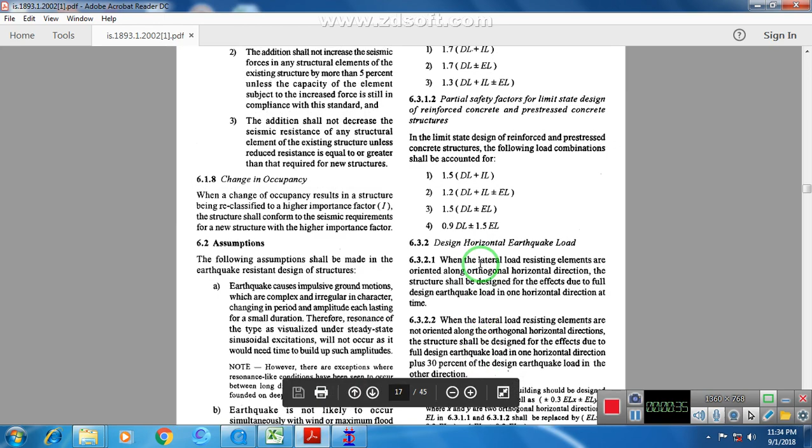Today I am making this video so that everyone can understand how to apply earthquake force in StaadPro. Before going into StaadPro, I will show you the codal provision, that is IS 1893 code, which is for earthquake forces. In this code there are certain definitions given which one should understand before applying earthquake forces in StaadPro. So guys, let's start.

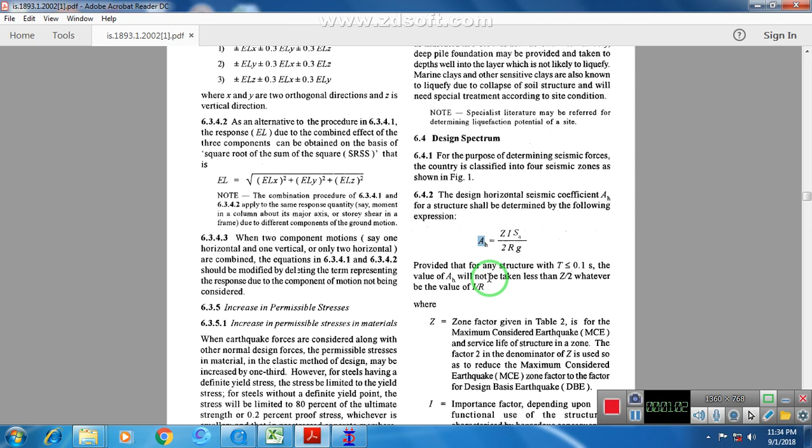This is a formula given in IS 1893. Ah is nothing but the horizontal acceleration which will hit a structure when an earthquake hits it. So ah is given as Z into I into Sa by g into 2R.

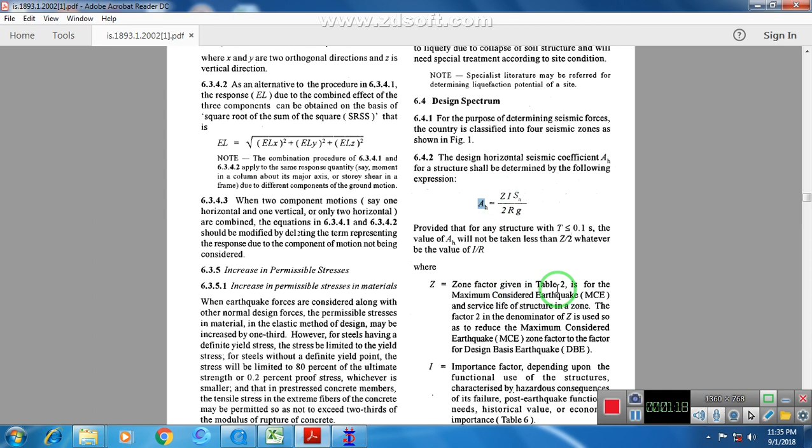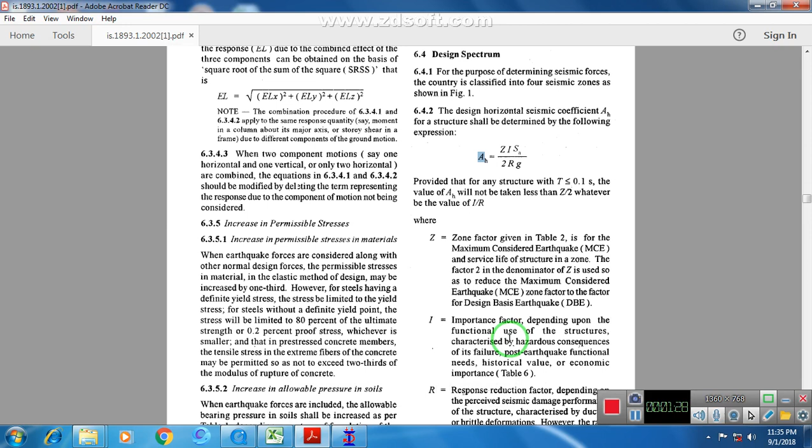Here Z is nothing but a zone factor which is given in table 2, and I is importance factor. Importance factor is nothing but how important a structure is, like whether it is a hospital, a residential building, or a firefighting building. On the basis of that, importance factors are given for different kinds of structures.

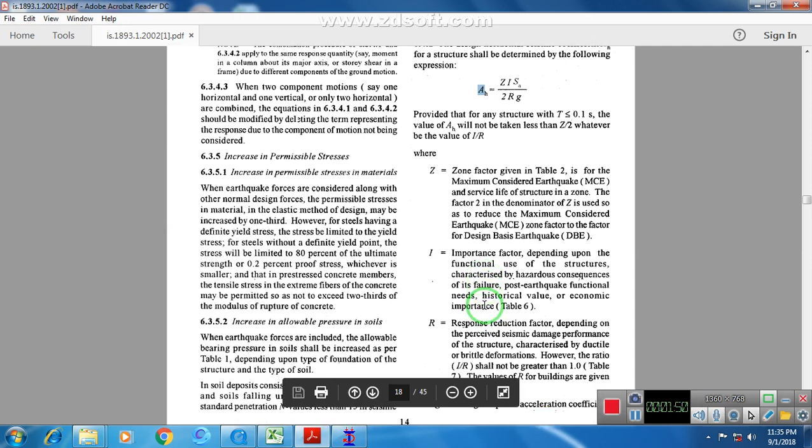And R is nothing but a response reduction factor, for which a table is given. This R value depends on which type of structure it is, like whether it is an ordinary moment resisting frame or a special moment resisting frame. On the basis of that, we have certain factors which we should consider.

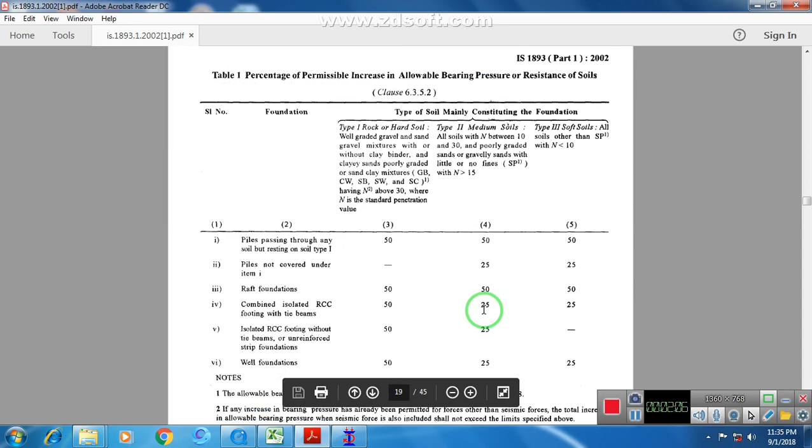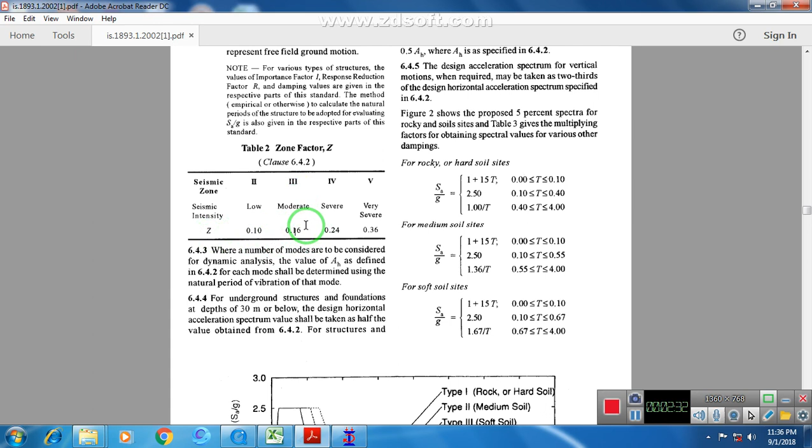I will show you the tables. This is the zone factor values. Here Z values are given for different seismic zone intensities, like we know that Mumbai falls under seismic zone 3. So for Mumbai, zone factor is 0.16. So this is about zone factor.

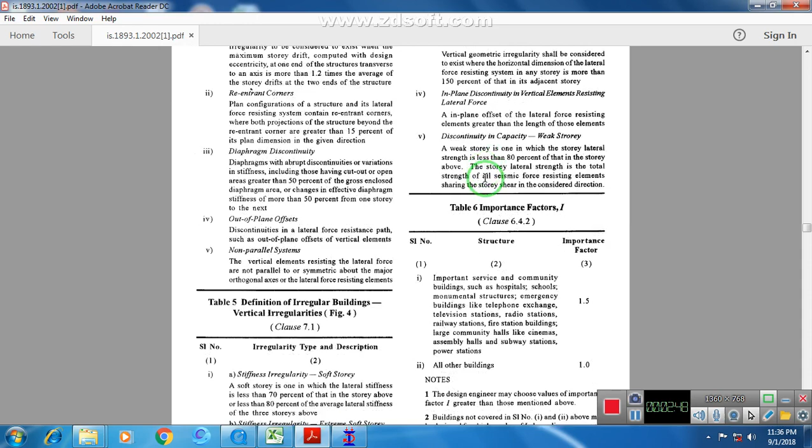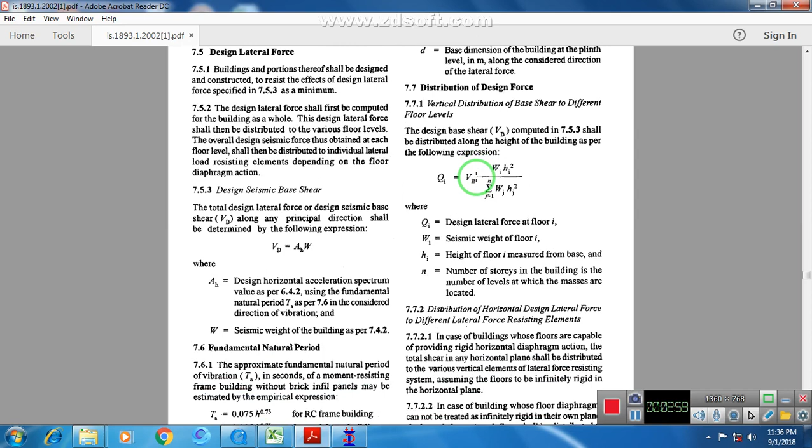And for Sa by g we have these values which depend on the time period. For this time period calculation, we have one formula given in this table only. That is T equals 0.09 H upon square root of D, where H is not printed in this PDF. So by this formula we can calculate the time period.

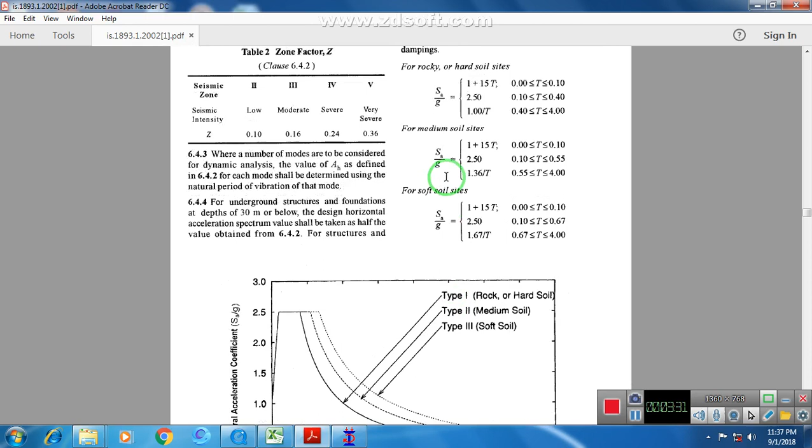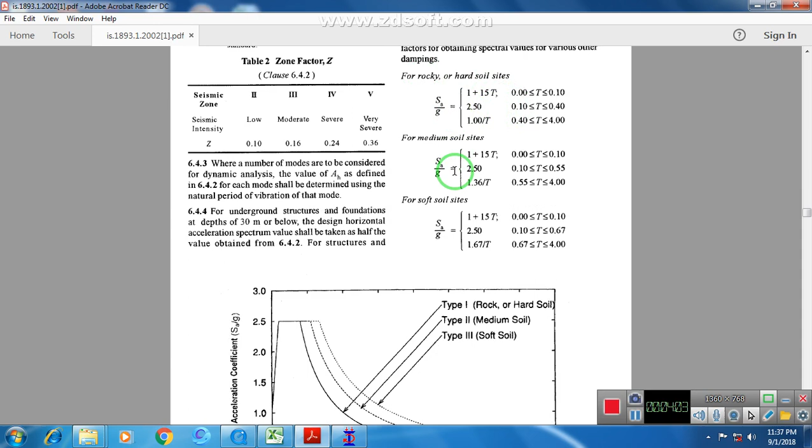Then by using this time period we can have a value of Sa by g. Here you can see we can put a value of T, and simply after that we can get a value of this Sa by g ratio. For that, one should know which type of soil strata is there, which can be identified by using a soil report. Since we don't have any soil report at the moment, I am considering it as rocky soil. So by using that we can calculate Sa by g.

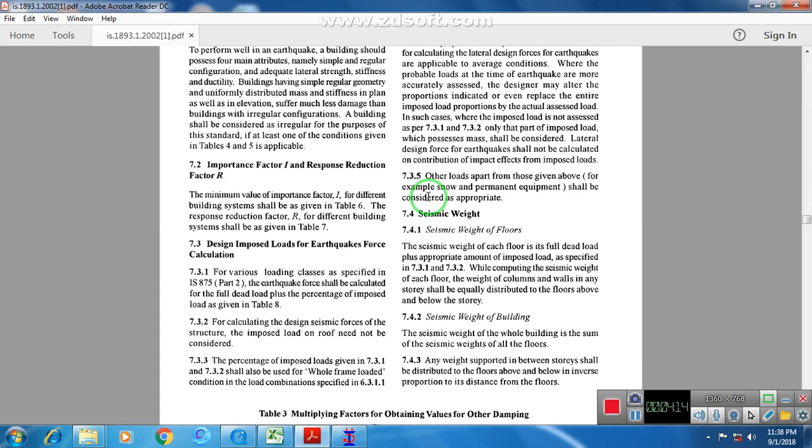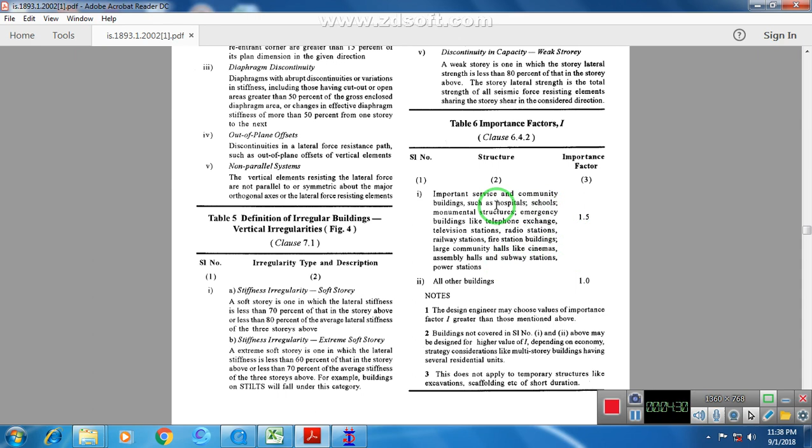So we have Z, Sa by g, and we have importance factor also. The only thing remaining is, as you can see, importance factor for important buildings like hospitals and schools is 1.5, and for all other buildings it is 1.

And the only thing remaining is our response reduction factor, which we should know. Here you can see table 7 which is given for response reduction factor R. Here different kinds of frames are there, and for those different kinds of frames we have different R values.

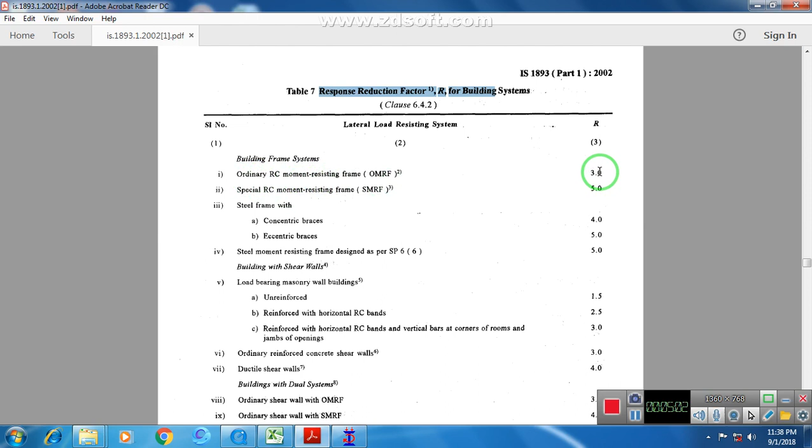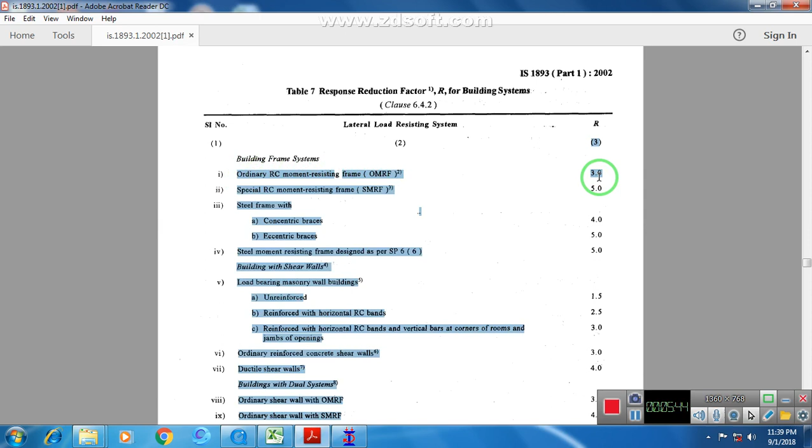For ordinary RCC moment resisting frame the value is 3, for special RC moment resisting frame the value is 5. Here ordinary RCC moment resisting frame means the columns and beams are not designed for ductile detailing, but in special RCC moment resisting frame we detail our columns and beams as ductile. Since our building is very small, we should not detail it with ductile detailing, as it will consume more reinforcement. So for such small buildings, ductile detailing is not required, so we will go with the ordinary RCC moment resisting frame, that is R equals 3.

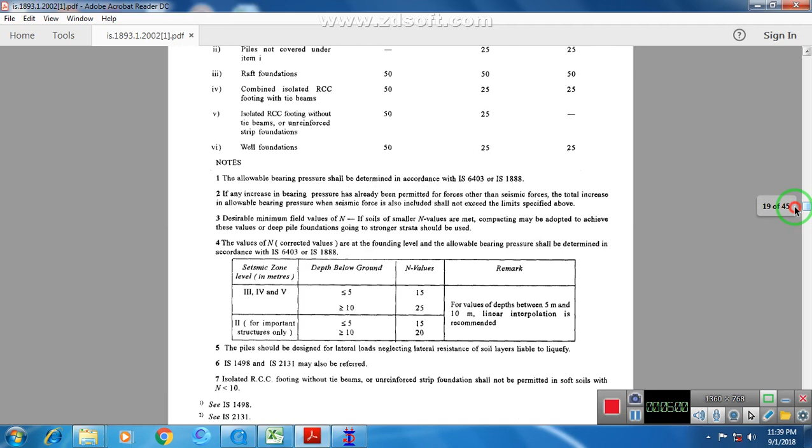So I have explained these terms so that you can understand what inputs are to be given in StaadPro. Now let's first go to the Staad model. I will use the same Staad model which I had used for wind load only, so that it will be easy for all of you to understand.

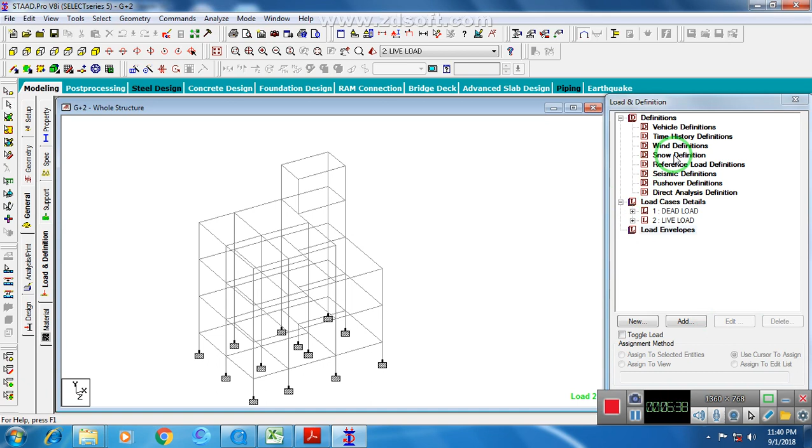Now since this video I am making for earthquake, I am going to delete this wind definition. Now I am going to delete this load case also related to wind. Now guys, let's first define a seismic definition.

So click here and click on add. Now select code. Our code is 1893, 2005... 2002. Okay, this is the code 1893:2002.

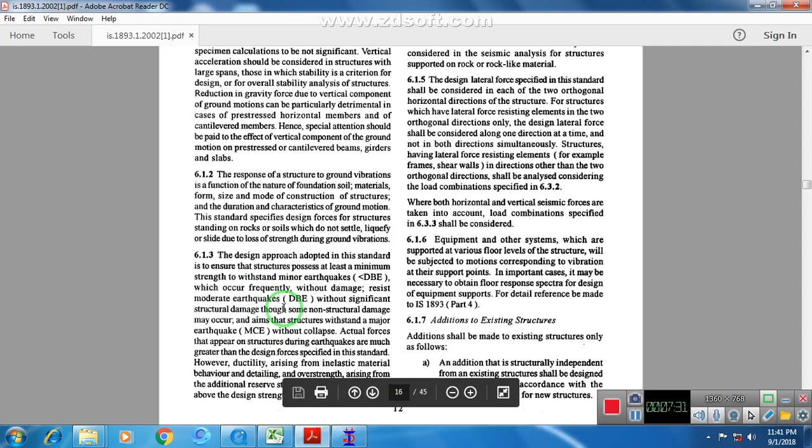So now either you can put values here, or you can simply click here on generate. Here you can put the Z value by selecting city or zone. If you select city, you have to select your city, or if you select zone, you will have 4 zone options, that is zone 2, zone 3, zone 4 and zone 5. These zones are mentioned in the IS code which I had shown you before.

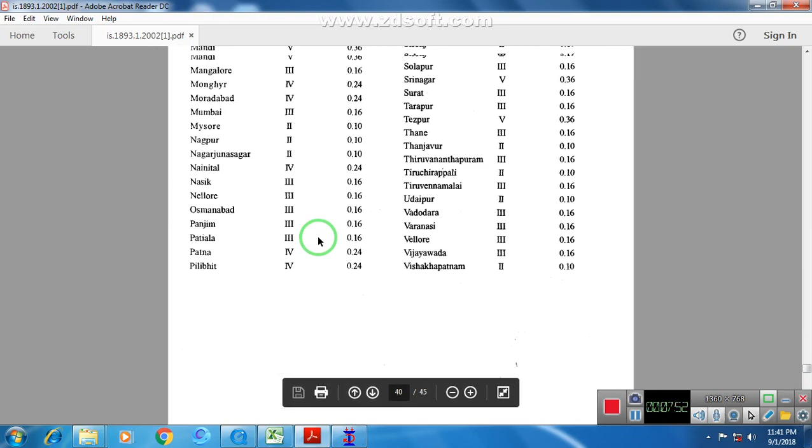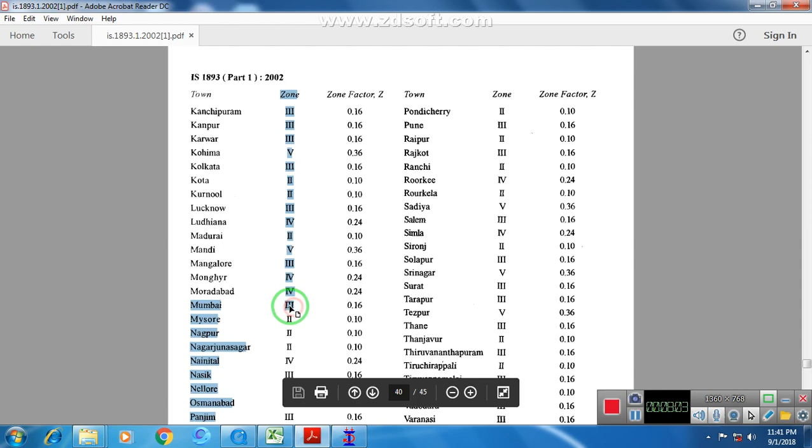Let me show you this one more time, like this: zone 2, zone 3, zone 4, zone 5. And we have a table also which shows different zone factor values for different cities. Like for Mumbai, we can see that Mumbai falls under zone 3, and for zone 3 we have zone factor as 0.16. So here you can simply select either zone or city, whatever you want. I am going with city, so this is Mumbai. For that, it is automatically taking 0.16.

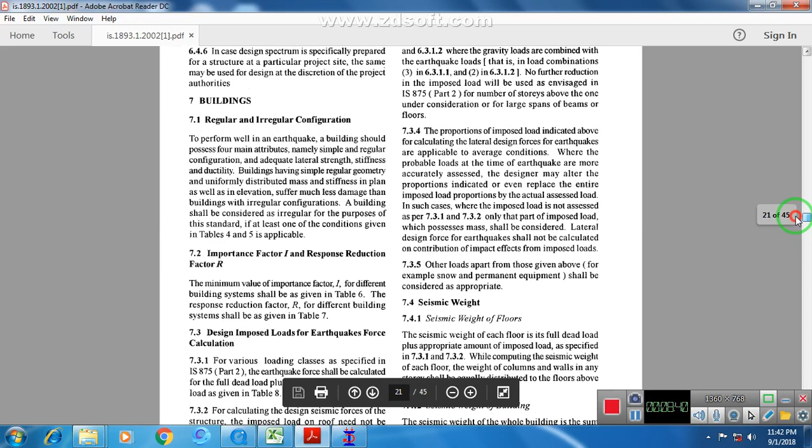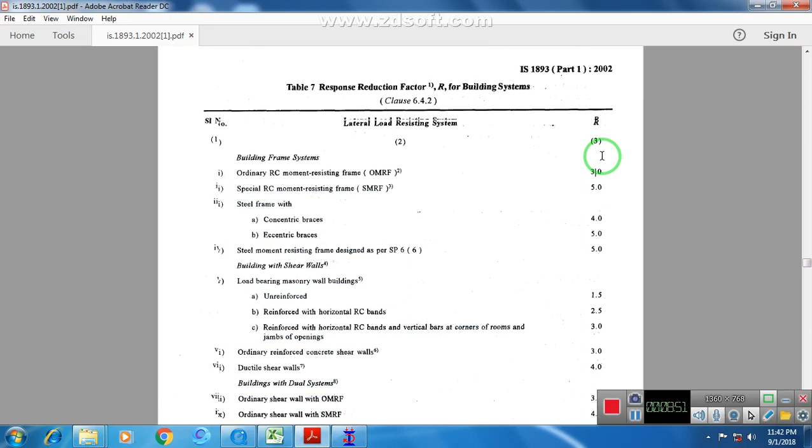Now as I told you, our structure will be an ordinary moment resisting frame, so I am selecting this, and for that the value is 3, as given in the IS code also. Here you can see for ordinary RC moment resisting frame, R is equal to 3. Okay, so now we have put this value.

Now importance factor: I'm considering it as a general building, so importance factor will be 1. And as I told you, I will consider a hard soil, so I am selecting hard soil. Then structural type, obviously our structure will be an RCC frame building, so I am selecting that. Damping ratio is different for RCC and steel structures. For steel structure this value is 2%, and for RCC structure it is 5%. This value is also mentioned in this IS code.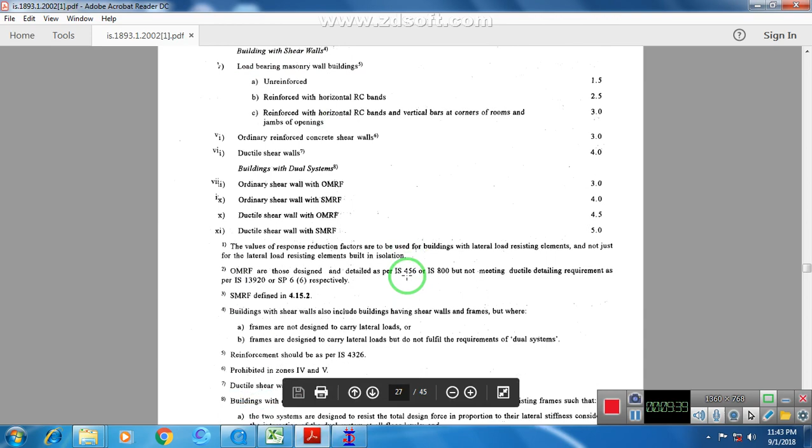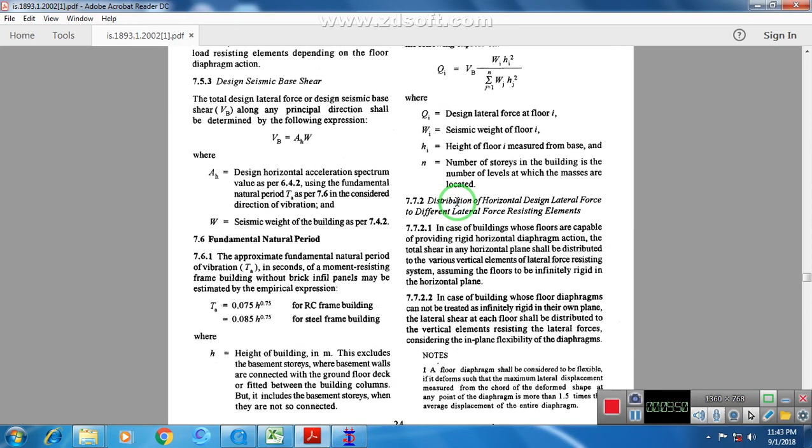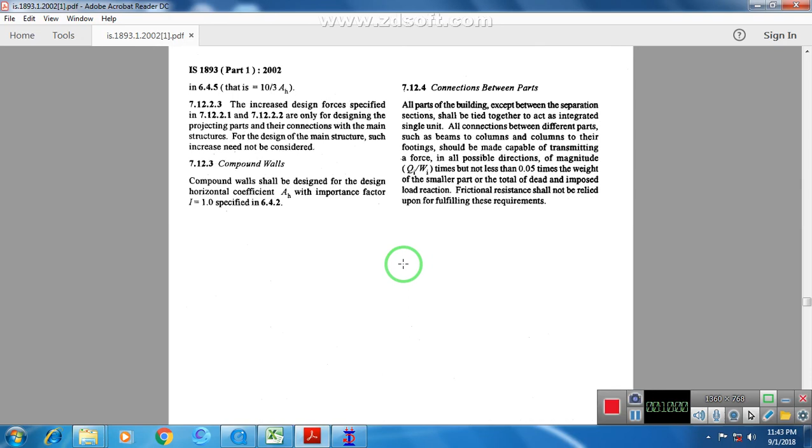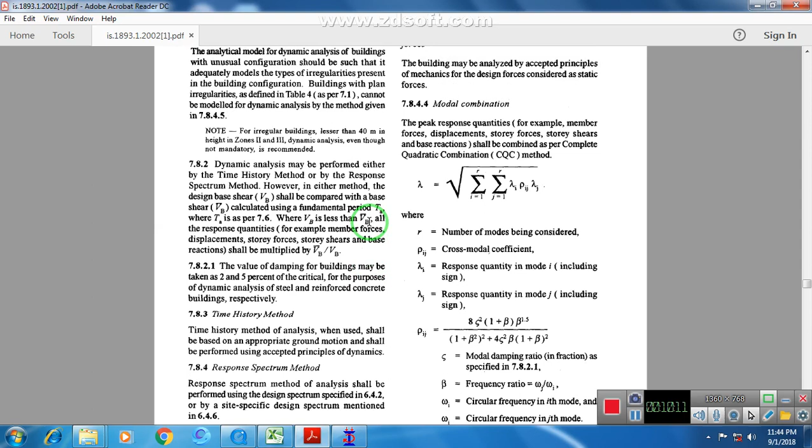So let's check where it is given. This value can be seen on page number 39. Here, the value of damping for buildings may be taken as 2% and 5% of the critical for the purposes of dynamic analysis of steel and reinforced concrete buildings. So 2 is for steel and 5 is for RCC concrete structures. Since our building is RCC, I am taking it as 5%.

Now, either you can put a time period yourself or let STAAD calculate it, but I will put this time period by my own calculation. For that I have made one Excel sheet. Don't worry guys, I will share this Excel sheet with you. Using this Excel sheet I will first calculate the time period which I have to put here. Then I will calculate Ah, and then the base shear, which we are going to cross check with STAAD Pro values. By doing this we can cross verify that STAAD Pro is giving correct values.

So let's proceed to calculate the time period. Here I have put the length, width and height of our building. Length of our building is 11 meter, width is 8 meter, and height is 14.1 meter. As I showed you, Z is the zone factor value; for Mumbai it is 0.16, and importance factor I am considering as 1. Response reduction factor I am taking as 3, and Sa/g value will be 2.5. This we will see after the time period calculation.

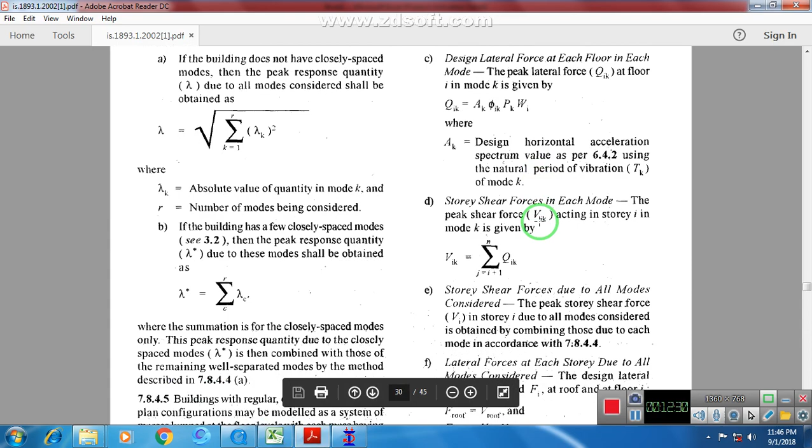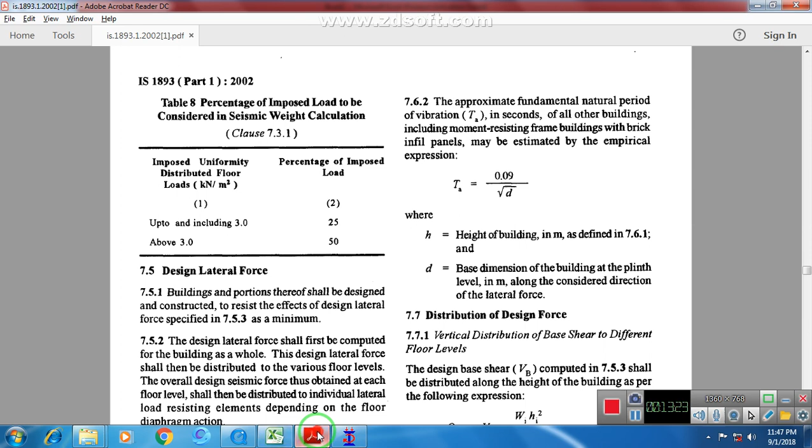For time period I had shown you one formula, T equals 0.09 H upon square root of D. Here is that formula. Using this formula I calculated the time periods for x direction and z direction. For x direction I have taken L, the length of the building, which is in x direction. Similarly I have calculated the time for z direction: T equals 0.09 h, height of the building, upon square root of base dimension. After calculating this time period we will calculate the Sa/g value from the code.

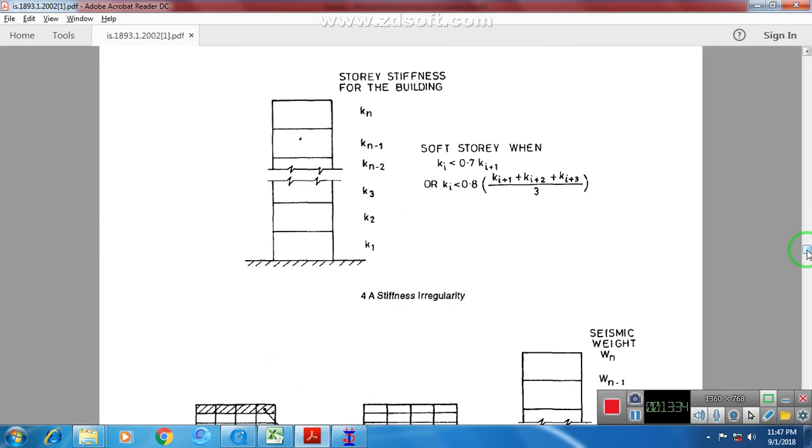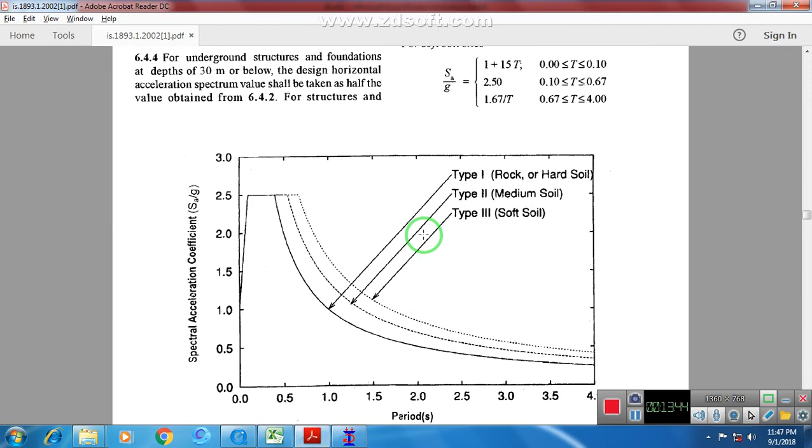So in the code we will see what value is to be considered for Sa/g. Since we have considered rock or hard soil, we will see these values only. Our time periods are 0.38 and 0.44. Our time period is not less than 0.1; it is greater than 0.1 and less than 0.4 for Tx. So for Tx we will take Sa/g as 2.5.

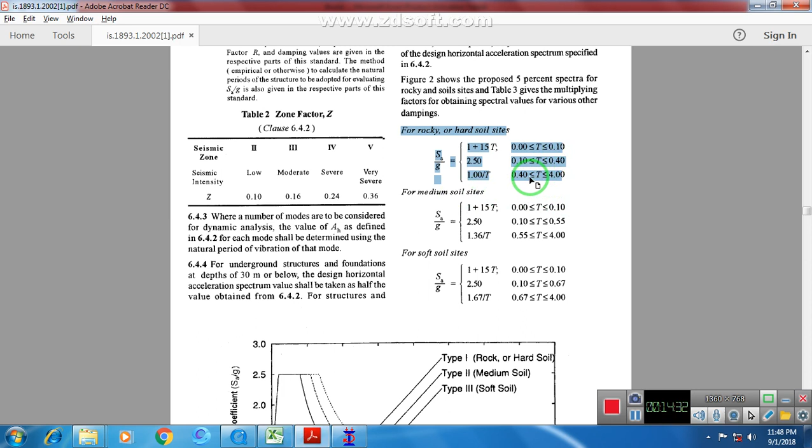Since our time period value is 0.44, which is greater than 0.4, for that we will take Sa/g as 1/T. So here I have taken Sa/g as 1/T for z direction since our Tz was greater than 0.4. Okay, so I have taken this condition for z direction, and for x direction I have considered this condition.

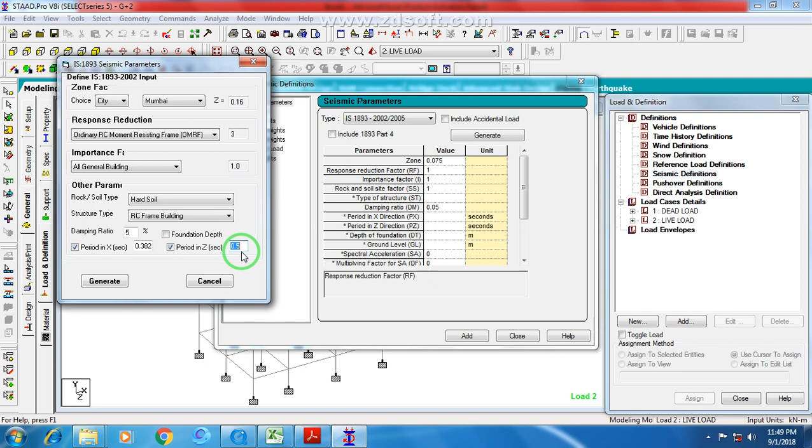So now we have time period. Let's put this time period value in STAAD Pro: 0.382 for X direction and 0.448 for Z direction. Okay guys, so now just click on generate. It will generate values here.

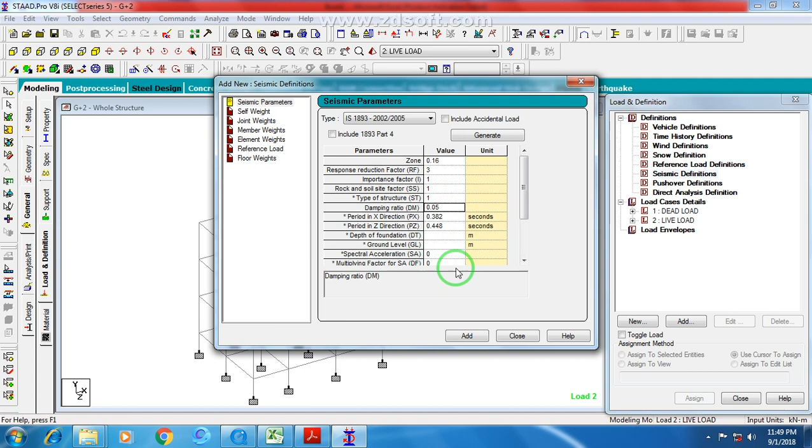Now there is one small problem with this: since this value is a percentage, it should be 0.05. Okay, now click on add. This self-weight factor should be 1, or you can just close it, it will consider it automatically. Now we have defined the seismic definition. Now let's hide it.

Now we will move to load case details. In load case details we already have dead and live, which is very important, because only from these loads will we get the seismic weight of the building, which will be used for seismic weight calculation. So let's add one seismic load case. Click add, select load type seismic,

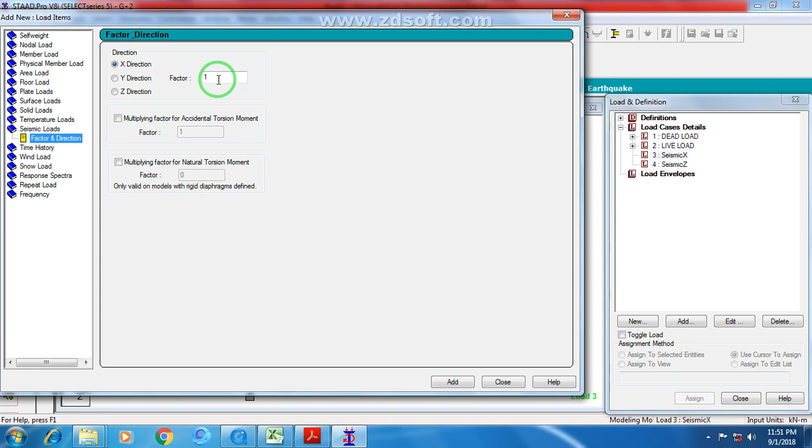seismic X. Okay, now click add. Now I will add one more, seismic Z. Click add. Now in seismic X, let's add a seismic load. Here you can see seismic load factor and direction. Since this is our seismic X, I will select X direction and factor will be 1.

So click 1, close. Then we will move to seismic Z, and here also I am going to add a seismic load. In this case I will consider Z direction and keep the factor as 1, just simply add 1.

Now guys, in STAAD Pro, to apply a static earthquake force definition, the earthquake load case must be the first load case. After the earthquake load case, we should define dead and live load cases, otherwise it will show an error. So your first load case must be the earthquake load case. After that you can define other load cases.

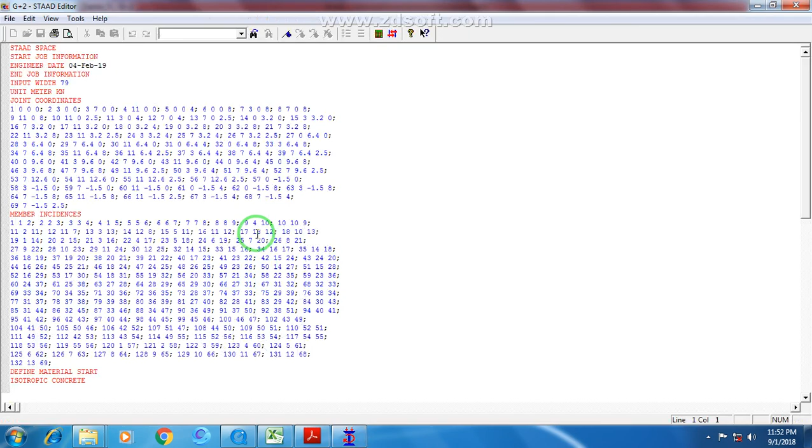Since I had defined these load cases earlier, I am defining earthquake after them, but I will correct it by going into the STAAD editor. Save. I will just cut and paste my earthquake load case before the dead and live load cases. From here onward I have the loading part, not load cases. So till here.

Now as you can see, this is my load definition for seismic forces, and from here onward I have the dead load type. This is the first load case, this is the second load case, live load, and this is my third and fourth load case, the earthquake load cases, which I must define before any other load cases. So I am pasting here and renumbering from 1, then this is 2. After that the other load cases will be 3 and 4.

Okay, so this is the sequence for defining earthquake force in STAAD Pro. First should be earthquake, then other load cases. Okay, now we have defined load cases. Now let's close it. Let's see. Yes, now it is correct. Seismic X, seismic Z, then after that dead and live.

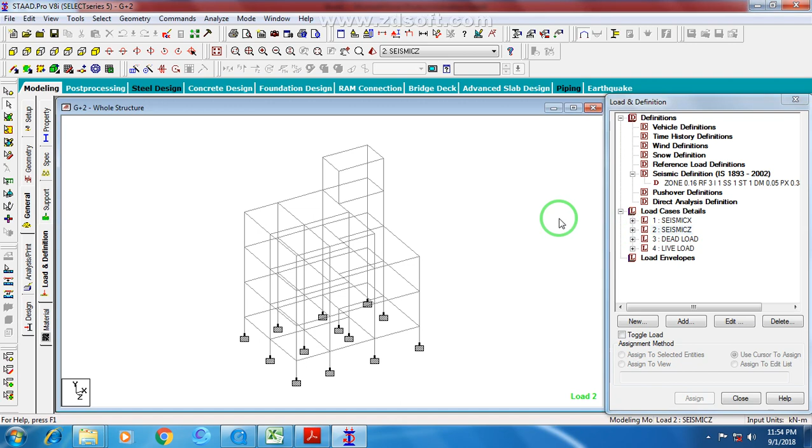Now we have defined a seismic definition, and we have also created load cases for seismic forces. Now the only thing remaining is calculation of seismic weight. For that we should tell STAAD Pro which loads to consider for the seismic weight of the building. Seismic weight is nothing but the dead weight of the building plus 25% or 50% of the live load.

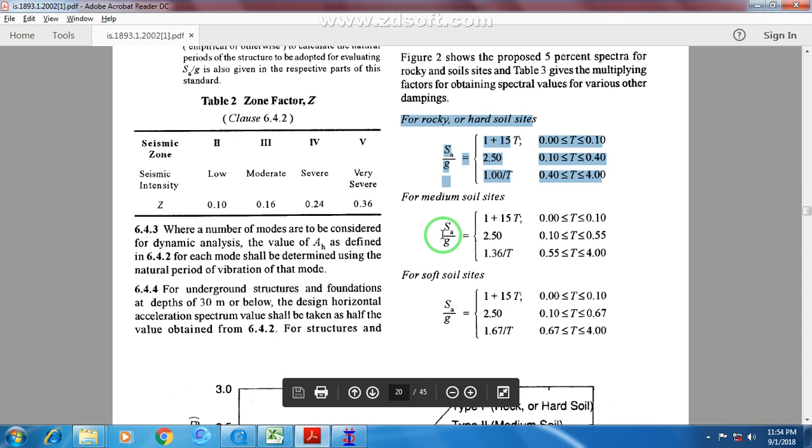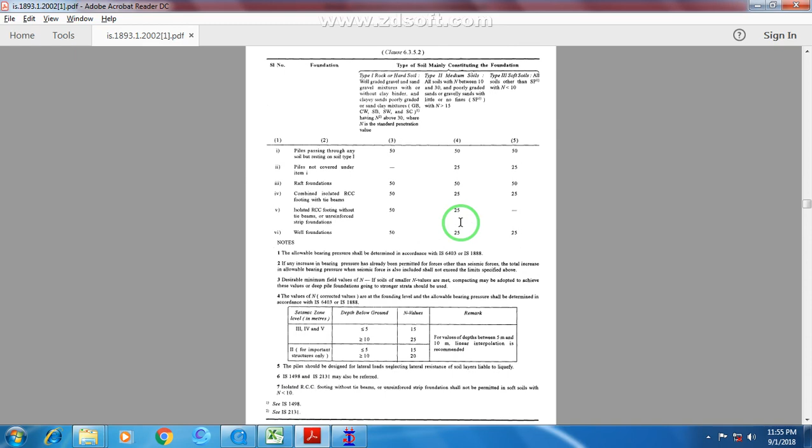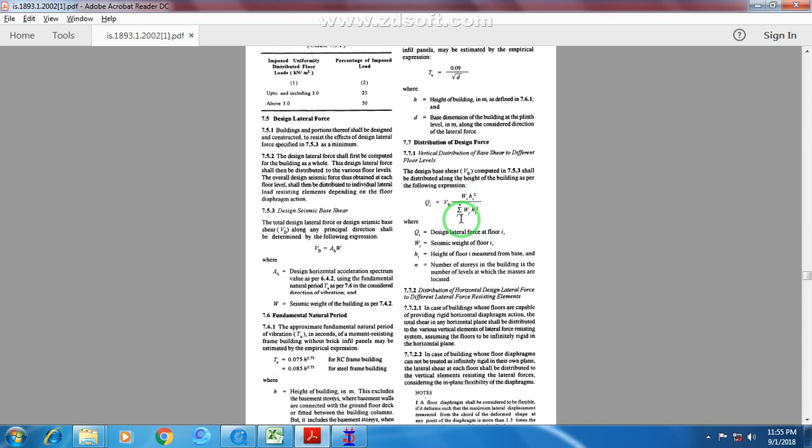For that, first let me tell you how much percent of live load you should consider for seismic weight calculation. So guys, here you can see the percentage of imposed load to be considered in seismic weight calculation. If your imposed load is up to 3 kilonewton per meter square, we take only 25% of the live load, or if it is greater than 3 kilonewton per meter square, we consider 50% of the live load.

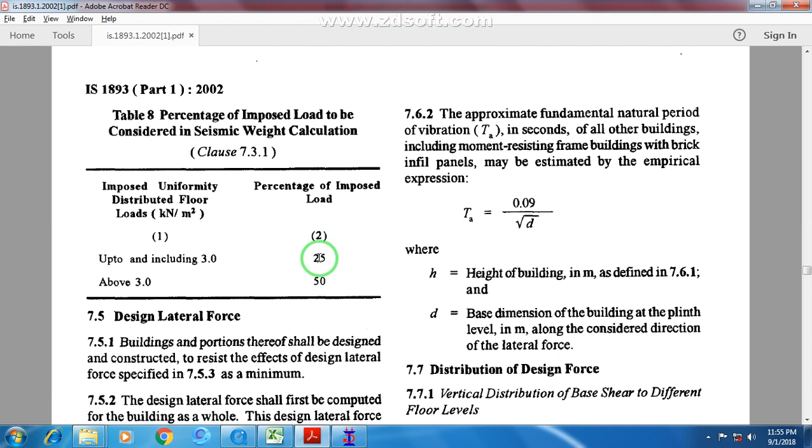Since in our case the live load is 3 kilonewton per meter square, we are going to consider only 25% of the live load for seismic weight calculation. So let's tell STAAD these are the loads to consider for seismic weight calculation. For that I have to copy this dead load and this live load and paste it just below the earthquake definition.

Now to tell STAAD that this is a mass source, you have to replace load by weight, and you have to remove these minus GY, GX terms from the mass source values. So let's remove, this is not required. This is a seismic weight, this should be only 1. No minus sign, no plus sign, no direction is required here, and load must be replaced with weight, W-E-I-G-H-T.

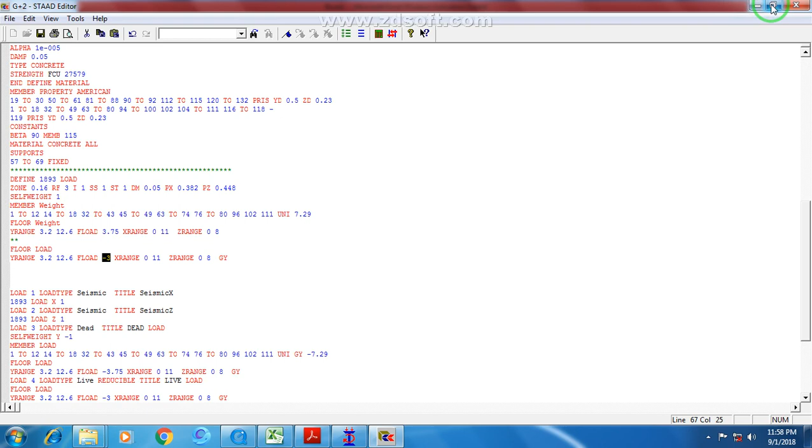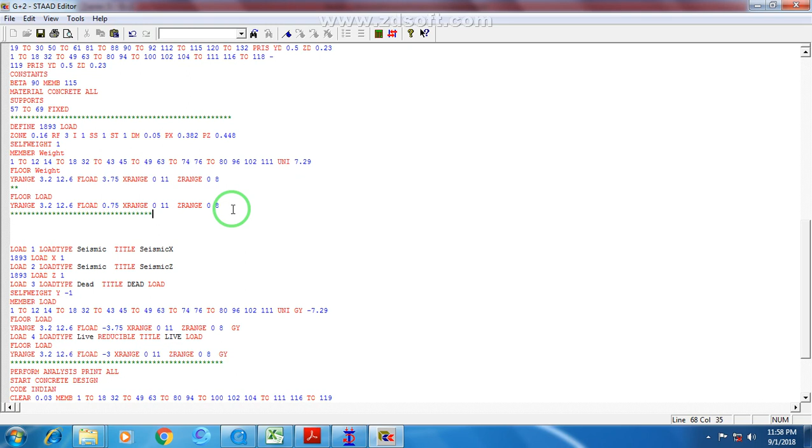This is our live load part, so I have to take only 25% of this live load. Let's save it first. 25% of live load, that is 3 into 0.25, is nothing but 0.75. So I have to put this value over there. I am going to write 0.75 and remove this GY. Okay, so we have provided STAAD Pro the mass source which is to be used for seismic weight calculation.

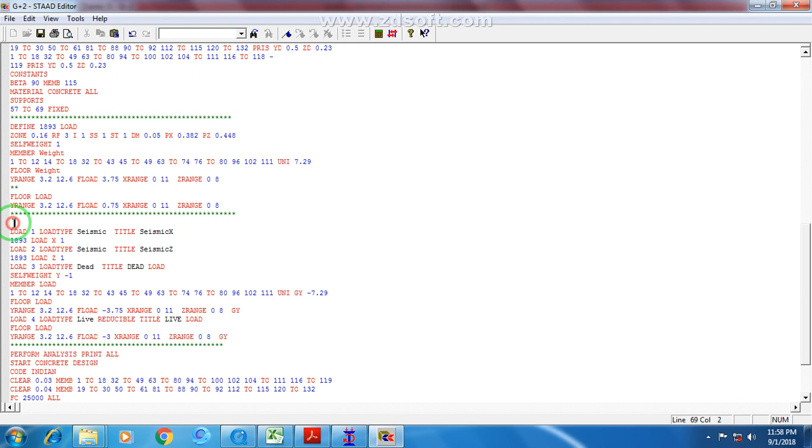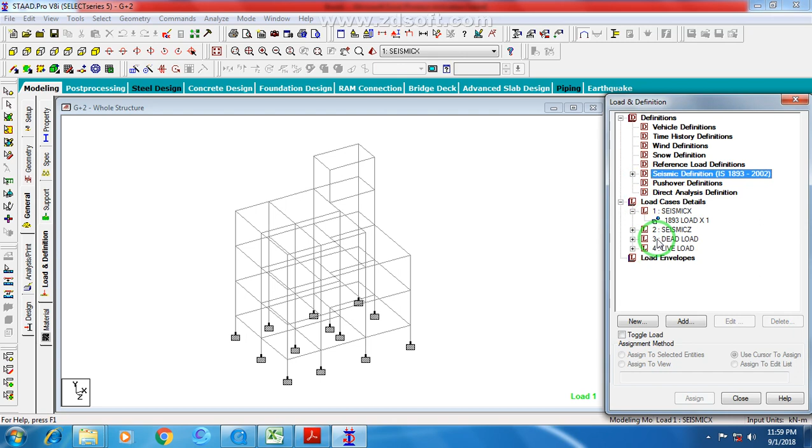So now everything is ready. Now we just have to close it. Now we have the seismic definition and seismic load cases. In that we have also defined the mass source. These are the mass sources to be used for seismic weight calculation. Now guys, let's run this STAAD model.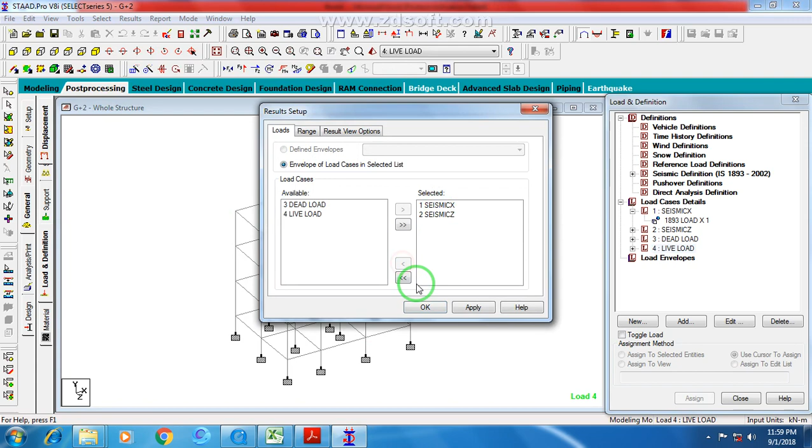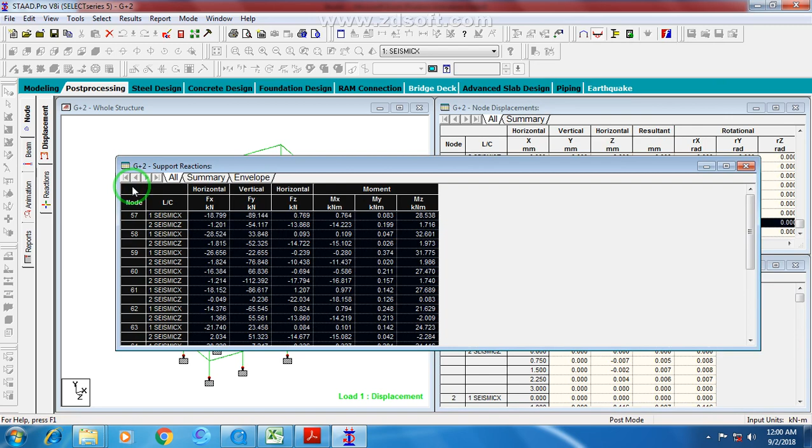Now let's check the results. I am going to check for seismic load cases only. Okay, so click OK. I have to take base reactions to cross check whether STAAD has done it properly or not. So I am copying this base reaction support reaction table to my Excel sheet. Here I have made one STAAD base reactions Excel sheet. So here I will paste it. Okay.

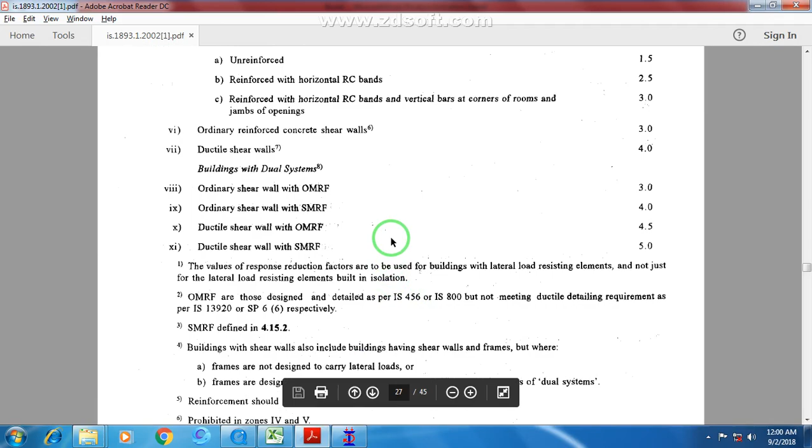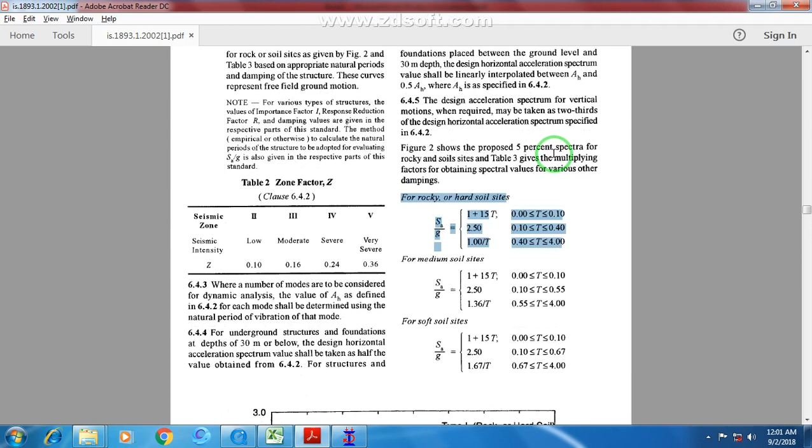Now let's move to our Excel sheet to verify whether STAAD has done it properly or not. Okay. We had calculated till here. On the basis of this T, on these values Z, I, R, Sa/g, we can calculate Ah. Ah is equal to ZI upon 2R into Sa/g. Here Ah is equal to ZI upon 2R into Sa/g.

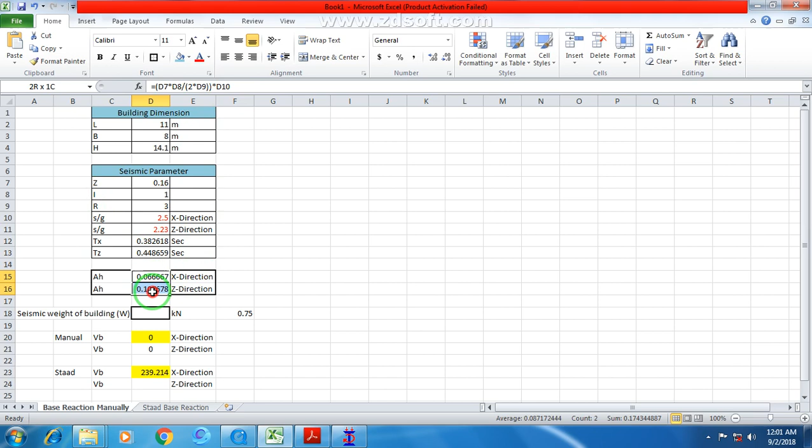So Ah is equal to ZI upon 2 times R and into Sa/g. So by this we got the Ah value for X direction and Z direction. Now the only thing we require is the seismic weight of the building. For that we will take help of STAAD.Pro.

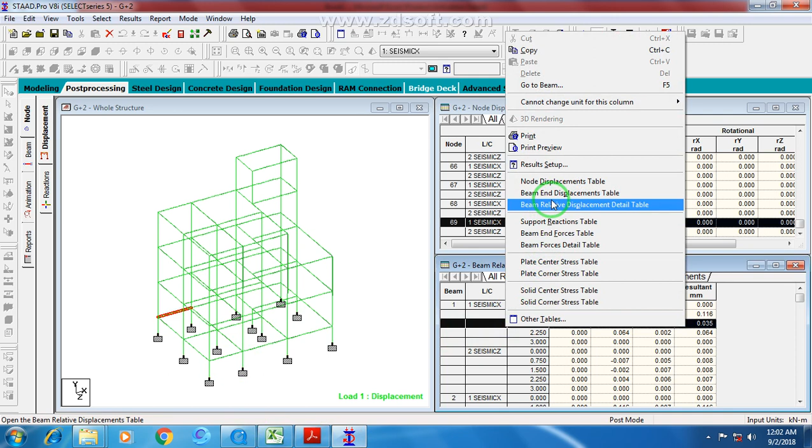So let's put a filter over here, apply filter. Now just consider only X direction. For seismic weight I have to take support reactions for dead and live, guys, as I had told you. So I have to do results setup. Now take dead and live load cases. Okay. Now take support reactions. These are for dead and live. Okay. So copy it and paste it over here.

We have to make one new Excel sheet. Okay. So from here we will simply add these Fy values, as in STAAD.Pro Y is vertical, so dead and live will act in the vertical Y direction. So we will add these Y forces for dead and live. So let's apply here also one filter. For live and dead we have to do it separately. This is my dead, equal to the sum of these.

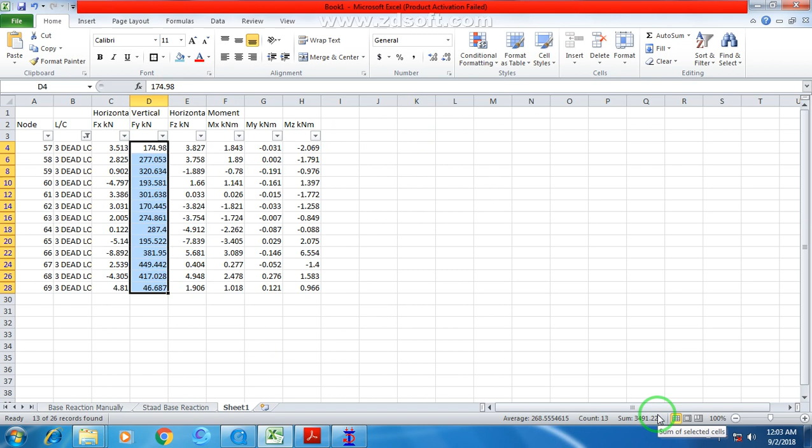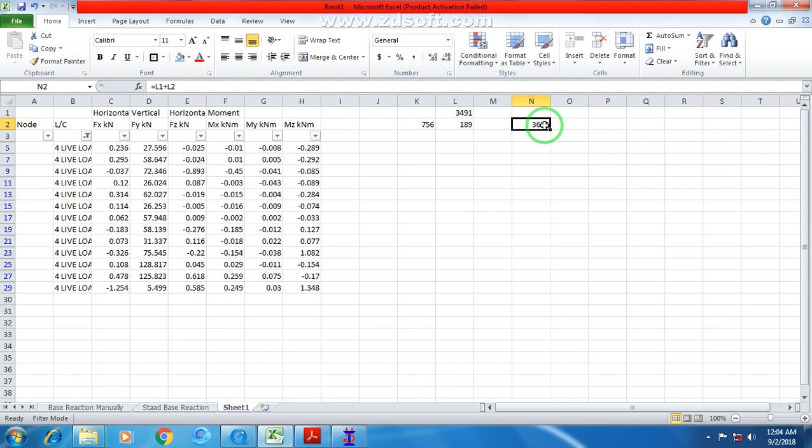This is nothing but 3491. 3491. Okay, now for live load it is 756. Okay, 756. Now since our live load is 3 kilonewton per meter square, we have to consider only 25% of this live load, so it is equal to 0.25 times this sum of live load. So this dead load plus this live load is nothing but our seismic weight of the building.

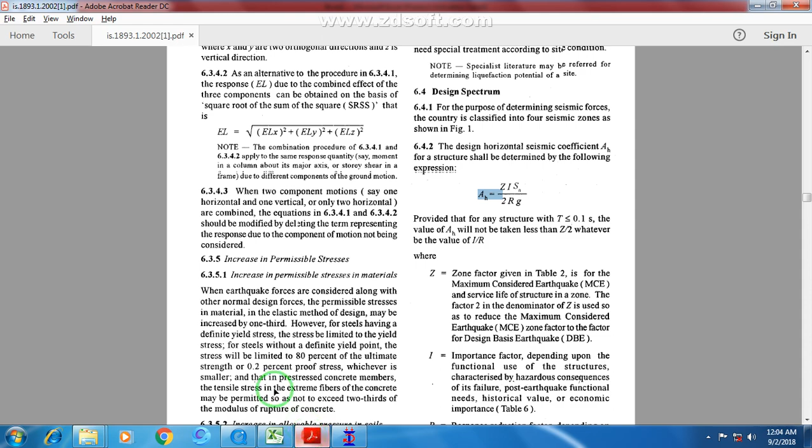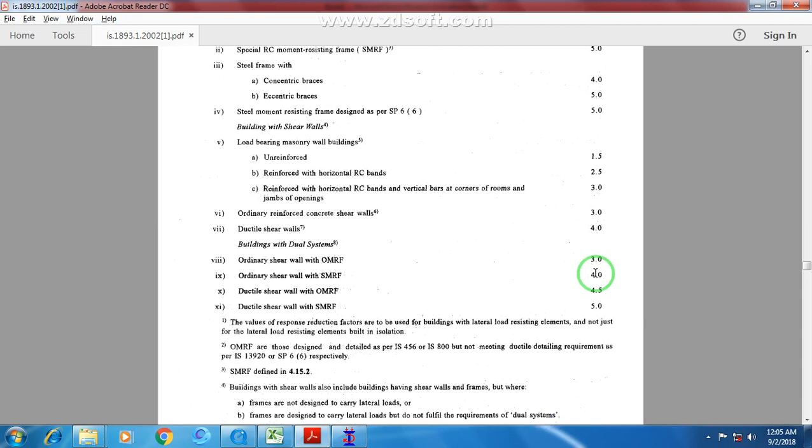Now I am going to link this in this sheet, so this is equal to this. Okay, so we got our seismic weight of the building. So now I will show one formula to calculate base shear. Our main aim was to calculate the base shear of the building, so we are one step behind to calculate base shear. So here is a formula to calculate base shear: VB is equal to Ah into W.

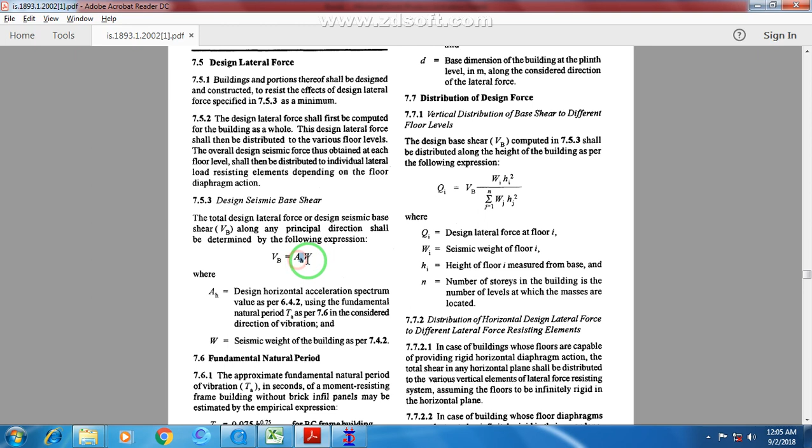Out of this we have calculated Ah and we have calculated W also. So we have Ah values for different directions and we also have W, that is the seismic weight of the building, for dead and live load case. So let's calculate base shear for X direction. Here you have to simply multiply Ah and W. So Ah of X direction into seismic weight will give you base shear for X direction, and Ah for Z direction into seismic weight will give you base shear in Z direction.

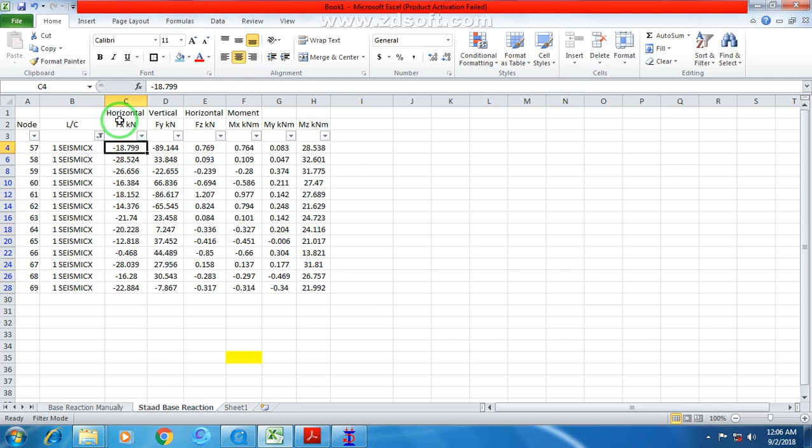Okay, now guys, let's see what value STAAD has given to us. So this sheet shows STAAD base reactions, which I had taken earlier. So from here you can see, for seismic X, I am looking for seismic X only. So these Fx forces I have to sum up, which is coming out to be 245.343 kilonewton, look here guys. Okay, which is the exact value which I have calculated. So it is exactly matching, 245.34. See, 245.34, it is exactly matching.

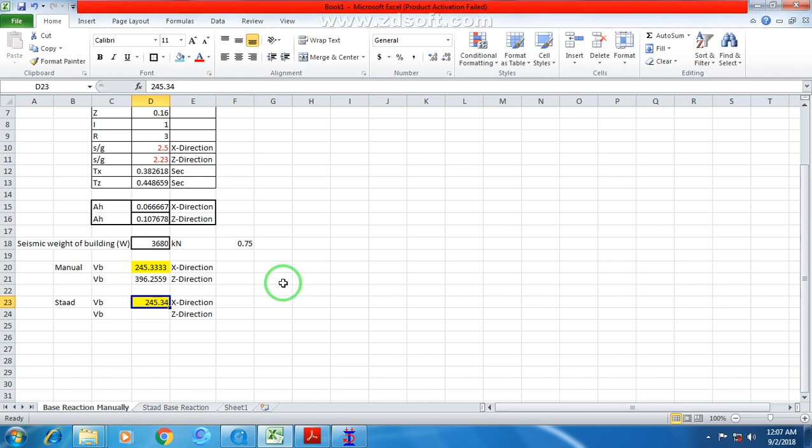So guys, this was a video to teach you how to apply a seismic force in a STAAD model and how to check it, how to cross verify whether STAAD is giving correct values or not.